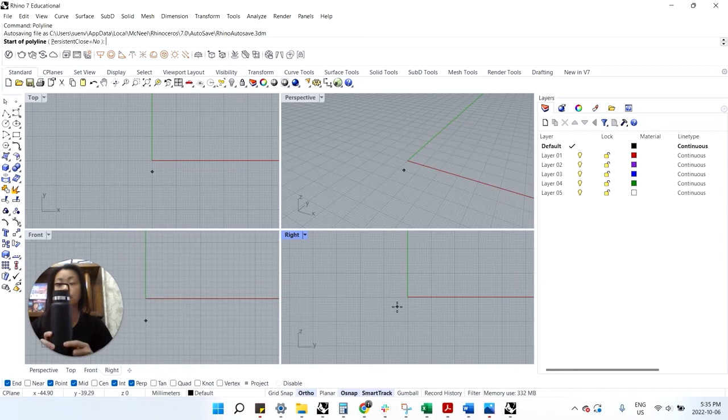So we'll jump right in. Today's tutorial will look at 3D modeling a water bottle, and it looks something like this. Very basic, basically a cylinder, there's a bit of curve at the lid, and then some metal material. We'll look into that, but it's still very simple, and I want to introduce you to some basic commands.

First things first is going into your file, 3D modeling file. You can go to File, New, and essentially just open this up. So going into my front view, I'm going to draw a curve. What you're going to do is draw a profile and then revolve that around and see what that looks like. Let's start at 0, 0, 0.

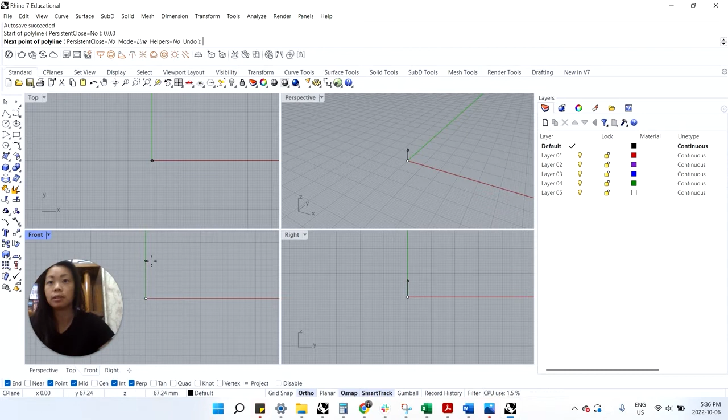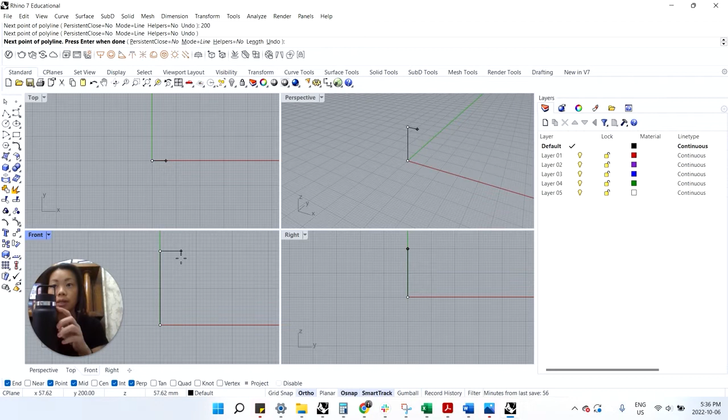So I'm going to type that in. Then I'm going to draw, let's say, 200 millimeters. So I'll zoom out with my wheel, click. And then it kind of curves up if you look at this water bottle, right? So I'm just going to say that's maybe 15 mils, and then it goes up again.

I'm going to model the top. Let's say that goes up 30 mils. I think that's good. And then now the water bottle isn't solid, right?

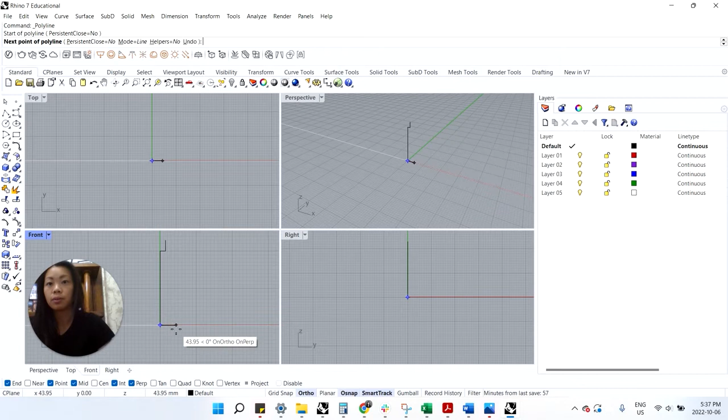So actually it's just like a thin material. So we'll want to think about offsetting that. But first, let's think about what is the diameter of the water bottle. Let's just say it's about 2 inches, so it's like 50 millimeters.

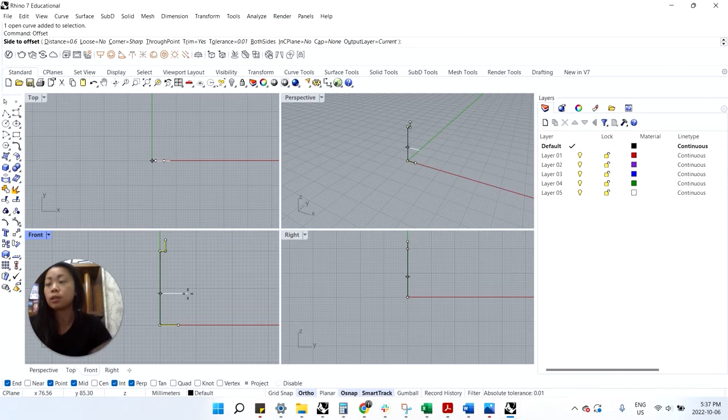So let me select this, hit join. So now it's one curve. Now I want to offset this by whatever thickness I feel that it is. So I'm going to type in offset. And right now we're in millimeters, so I'm going to offset it by, let's just say 5 millimeters.

Offsetting it by the inside, right? And then I'm going to see if I can create a closed loop. So I kind of touch those endpoints, make sure again your Osnap is on so that you can make sure these are snapped. And actually before I do that, these corners are quite sharp, so let's fillet those corners.

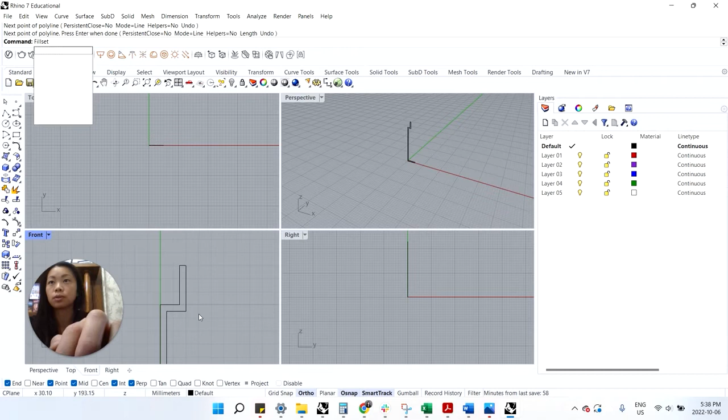So type in fillet, radius of let's just say 10. See what that looks like. I'm okay with that, but I'm going to Control Z and do that again because my trim is not on, so I'll make sure that's on. And then this edge is maybe a bit less, so let's do fillet, radius of let's say 3.

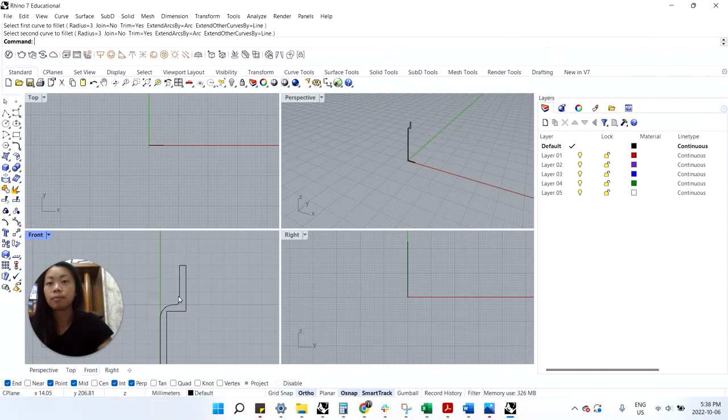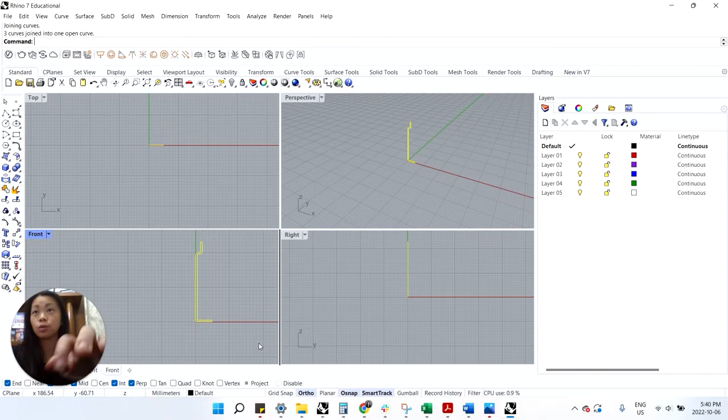I'm okay with that. And then I'll do the bottom as well, so maybe I'll delete this. I'll offset again of 5. Let's see what that looks like. Okay, so I'm going to grab all these lines. I'll type in join, and then it's good. I'll just select that, it has one open end, and I'm just going to hit closed curve. So that would be good.

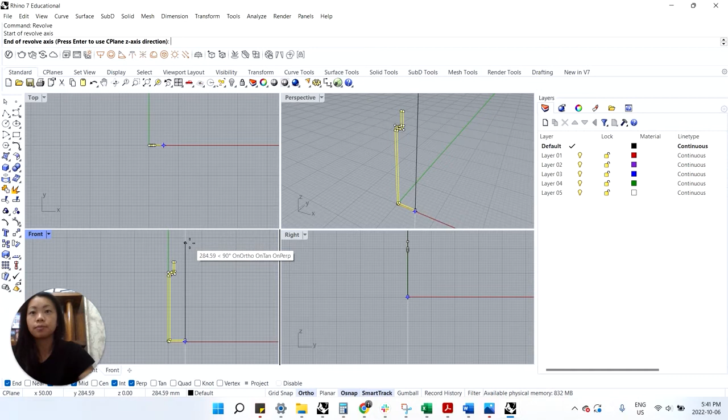Next you'll see, so this is what it looks like in 3D. Next we want to type in the revolve command. So next when we type that in, we need to start the revolve axis. This would be right down the center, for example. Angle, start of the angle is, let's say in the top view or even in the perspective, we can click here, and then we want it 360.

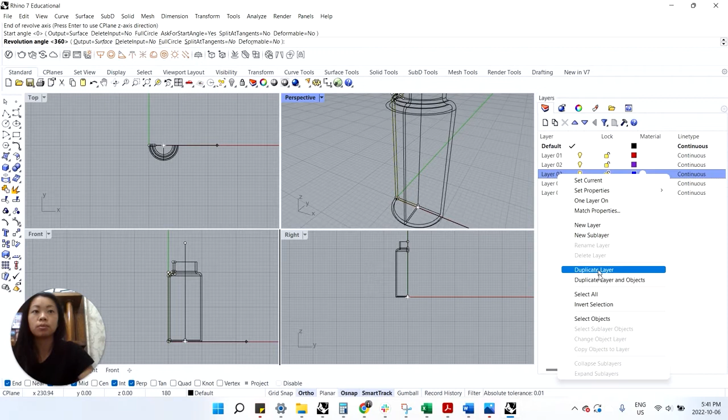Delete input, let's say no. And let's just rename this, or let's make it to this layer. Think we'll hit enter, see what that looks like. Let's create this, change it to the rendered or shaded view. Right, and that's a water bottle. There you go, right? Very basic.

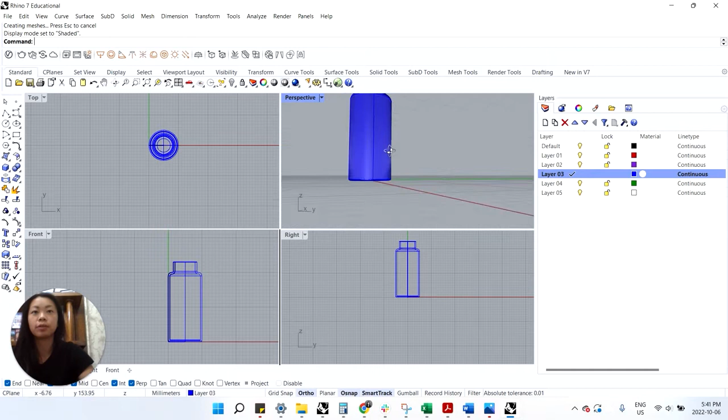We can always rename this to black water bottle body. It's important to have separate layers for separate materials. That's one good way of separating your layers, right? And then this could be your, it's called the red layer curves.

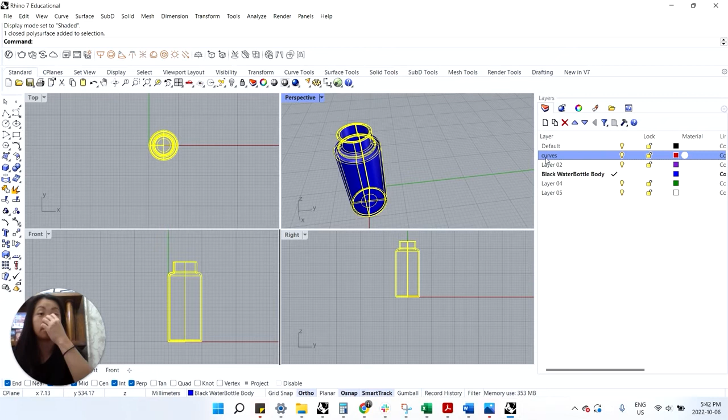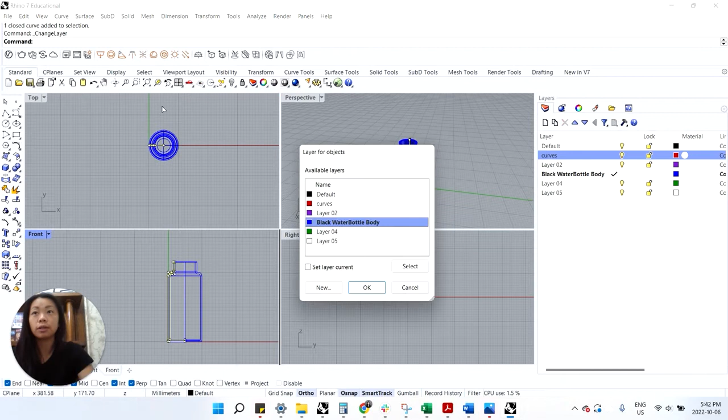So we just renamed the layer here to curves, and we can always choose that polyline, choosing the change layer command and switching it to curves, right? So now we can toggle this on and off as needed.

And next, what we want to do is maybe model the cap right here, right? So it's a cylinder, and we got a bit of a lip as a handle. So we can model that next. I'm thinking I could just do a cylinder, and then I can model the handle separately and then combine them together. So one way of doing that is by simply clicking the curves, I can check off center point here.

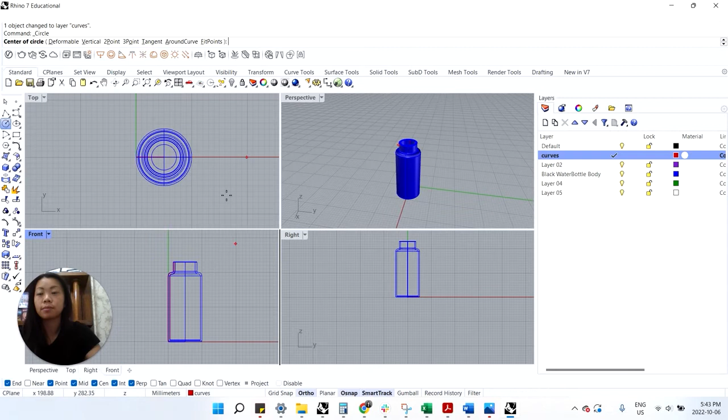Right now I have the projected command on, so it made it go to the 0 axis. I'm just going to shift this up, then I'll offset it by, say, this distance.

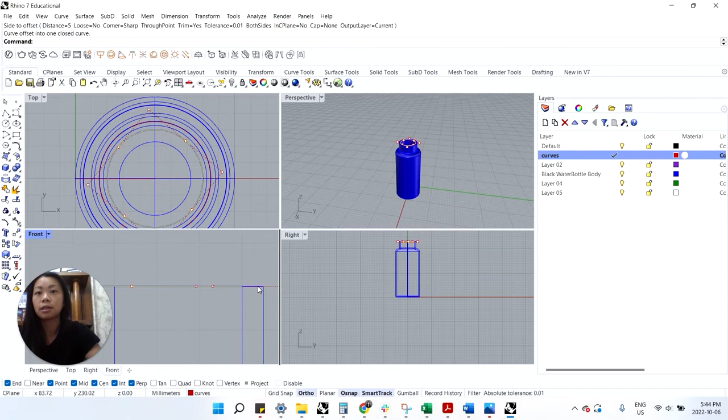So then now, I think if I extrude the curve up, let's say 15. That's what it looks like, right?

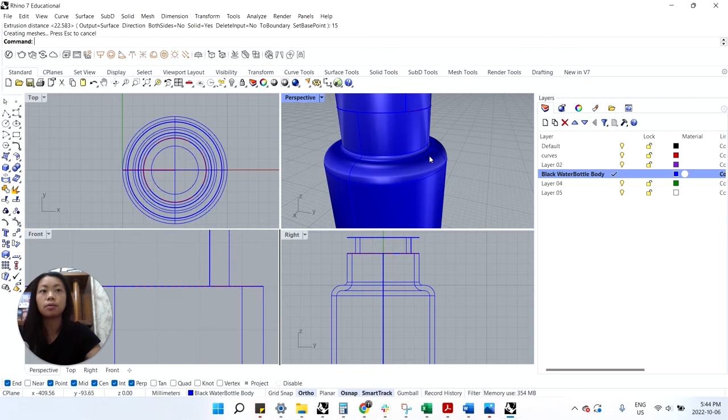So we might want to change that layer. Let's rename this to water bottle, and we'll rename this to water bottle cap.

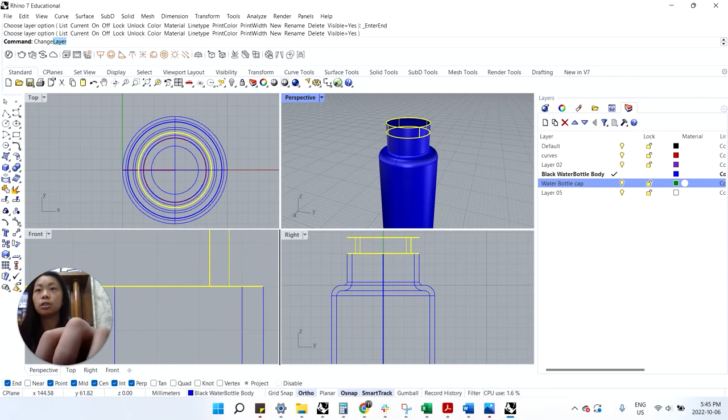And then we can change the layer to - type in change layer - to the water bottle cap, right? So you can see those are distinct elements.

Next we will draw the handle. So let me grab this. This go by, say, 20 millimeters.

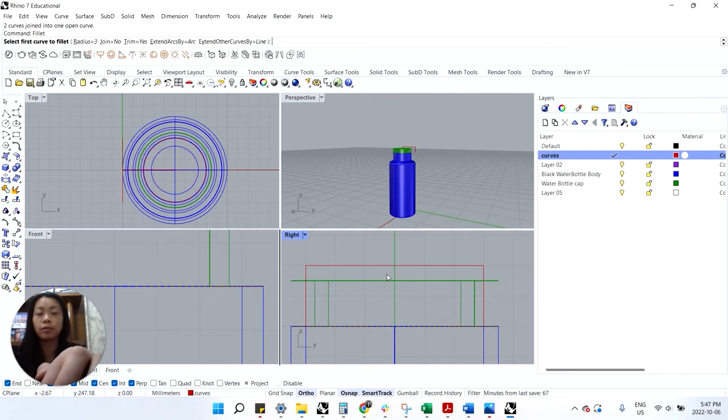Let's see if I can grab - well, I'll just grab this. I can always mirror it. And then I'll join these, and I'll fillet a bit of a curve there by radius of 10.

And then maybe I'll offset this by 3. Seems a bit much, let's say 2. And then let's see if we can join those - join and then close curve.

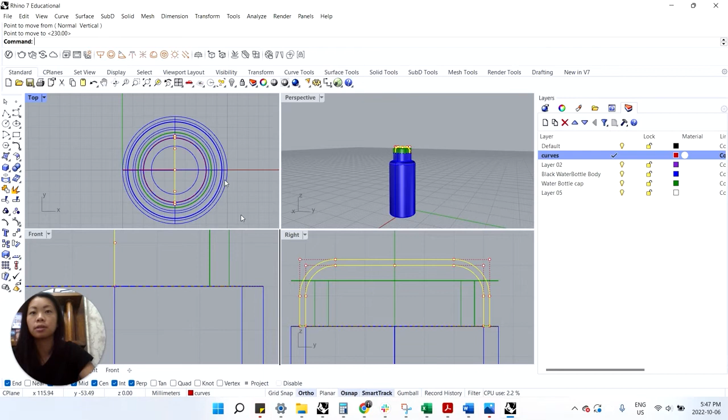There you go, I'll just move this to the center now. And then I can move this up. So now you can see what it looks like there.

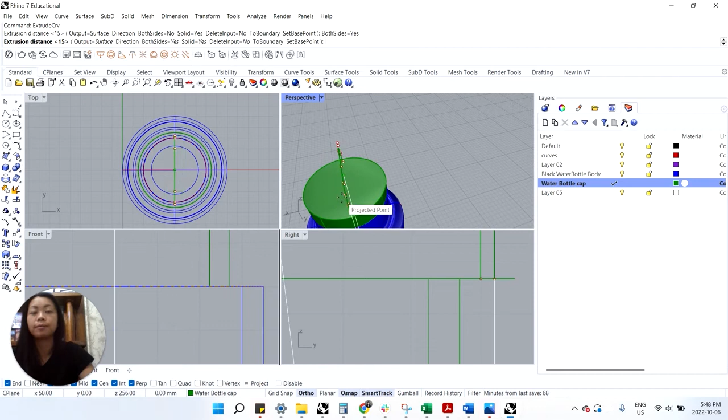And then now I can extrude curve. Make sure it's checked on the water bottle cap. And then we can even do both sides, right? Look at that - since our curve is in the center, we can extrude on both sides.

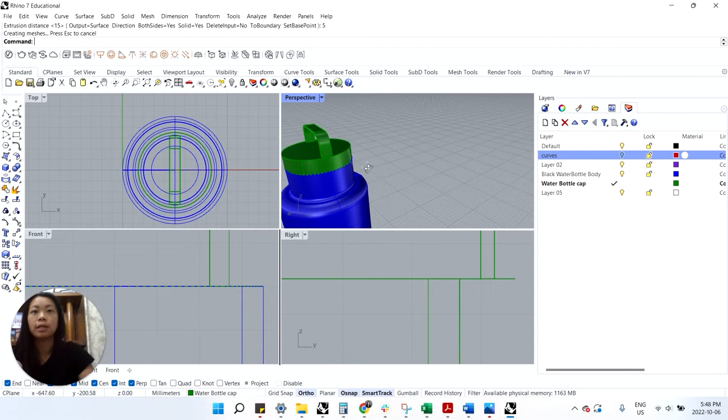Looking at what that measurement is, I think we'll do something like 5 on both sides. So there you go. Switch off the curves. Next we can select both solids and type in BooleanUnion.

So now these are two combined objects. If you really wanted to, you could even draw a lip so that the lid kind of carries forward there. So we could use that solid, for example.

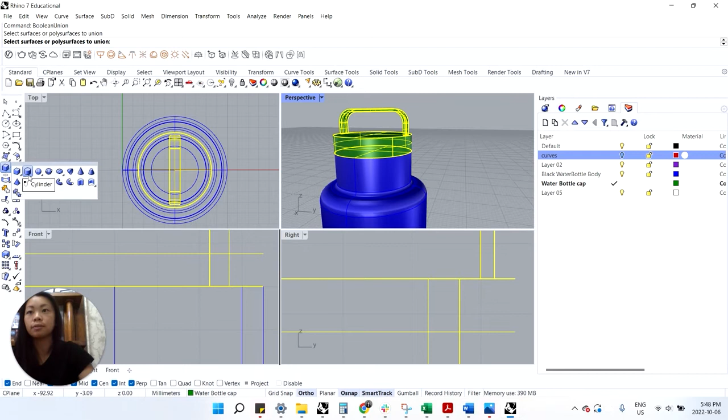Cylinder. If we want to, roughly, I believe it's here, and then we zoom out. What does that look like? Let's do 10.

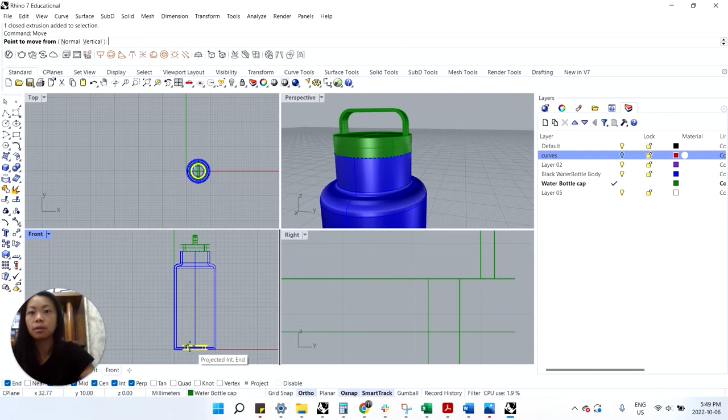We can move that up. Let's see. Right, then we can combine those again, BooleanUnion. So you can see what that looks like - it's like a cap with a bit of a lip there, so it kind of fits in.

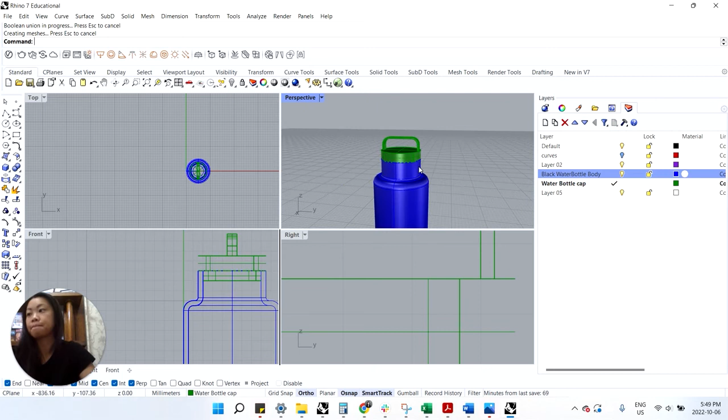And then next we can see like this water bottle that I'm showing you has a metal kind of detail here, and on the bottom is metal as well. We might want to separate those parts of the solids so that we can render them as separate materials perhaps.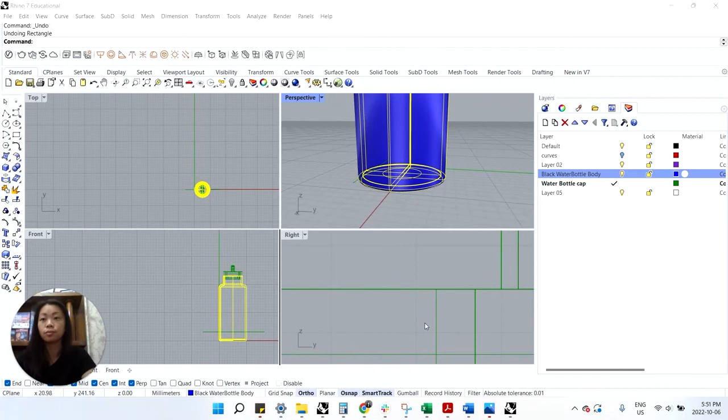So if we're going to split this blue object right here to have that metal lip top and bottom, what we can do is create a plane that essentially splits or slices through that object, and then we can create them into separate elements. So what I'll do is I'll select this command.

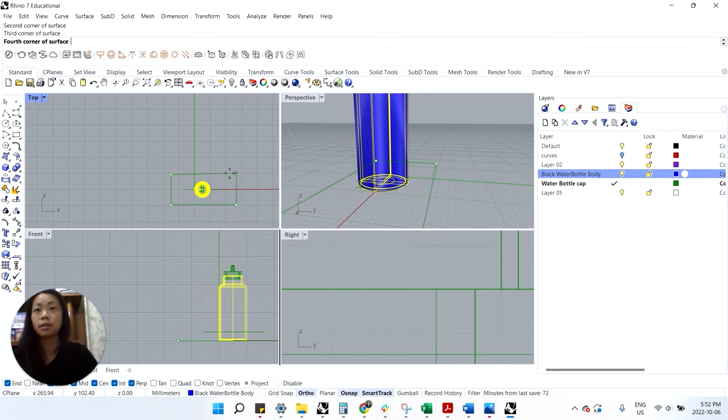It's called surface, and I will create a plane. Again, have project on. Right, so this is a plane, and then I'm going to move it up to some distance - let's just say 20.

And I'm also going to do that at the top, so I'm going to make a copy. And then I'll see if I can grab something there.

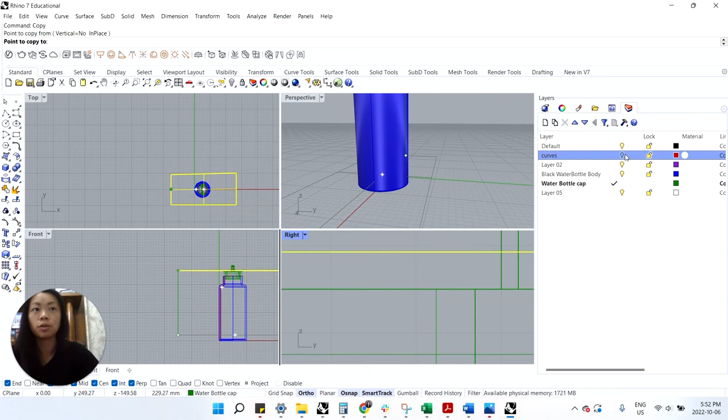Turn on the curve so I can grab that corner. Okay, and then let's move that by 20 as well, let's say. Move it 20 and then click. Alright, so I have two planes.

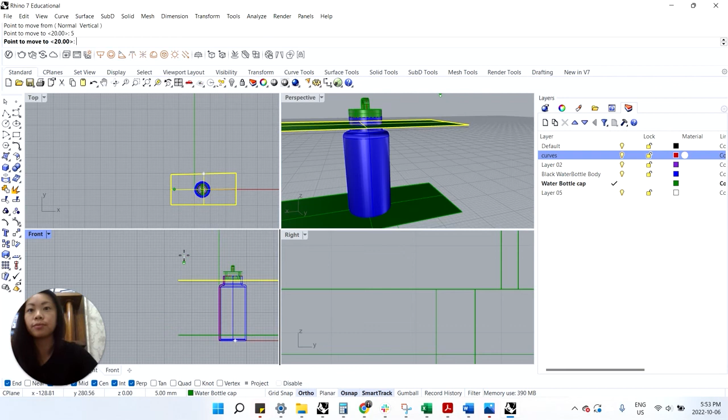I want to slice that top and bottom. Seems a bit thick, let me move that up by 5. I'll click. Then I'll do the same here, move that down by 5. Just aesthetics, so it's not a big deal.

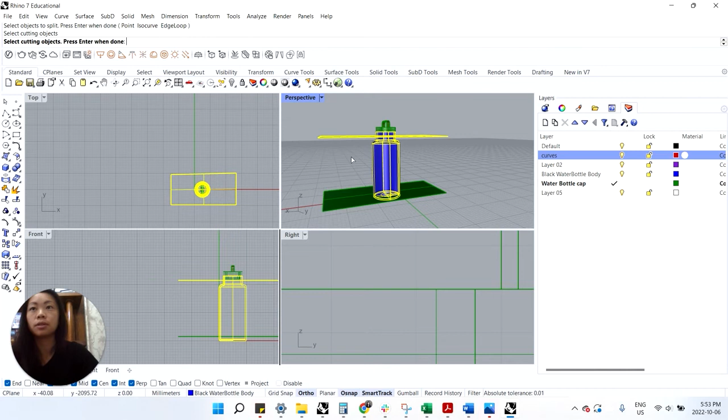Alright, next we'll use a split command. So type in split, select the object you want to split - that's the blue one. Hit enter and then select cutting objects - that'll be this green one, these two green ones.

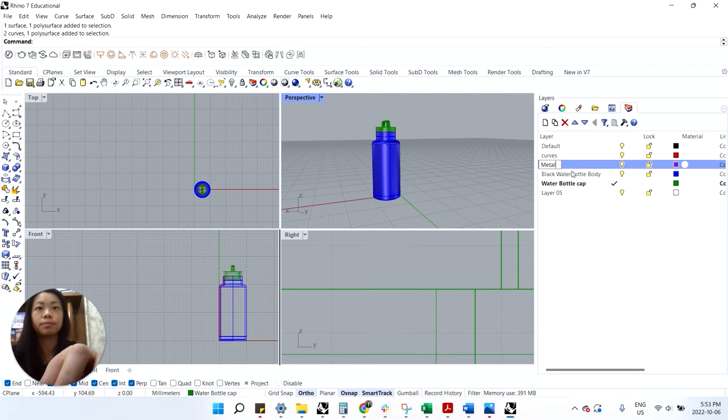And then we don't need these planes anymore, so I'll just delete them. What you'll notice is you'll have a couple objects here and then a couple objects there. So I'm going to rename this purple layer, for example, call it metal.

And I'll turn off the curves, and I'm going to select the objects here, hold shift and select those objects. Then I'm going to change that to the metal layer. Let's turn off the blue for a second so you'll know you have these two planes, right?

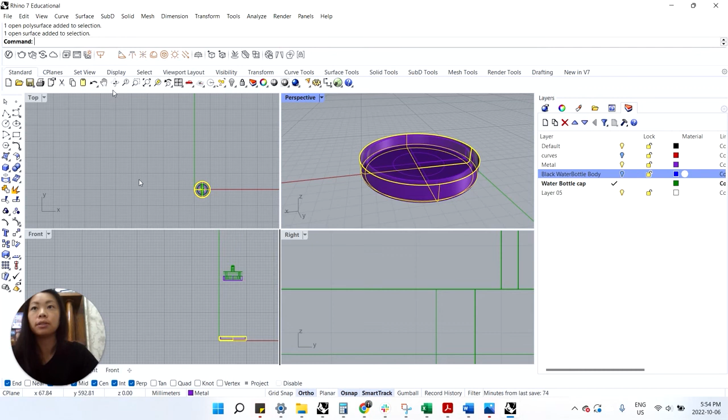And I still need to make it a solid, so what you can do is cap - select objects to cap, there's these two. And then now I think you should have something like that.

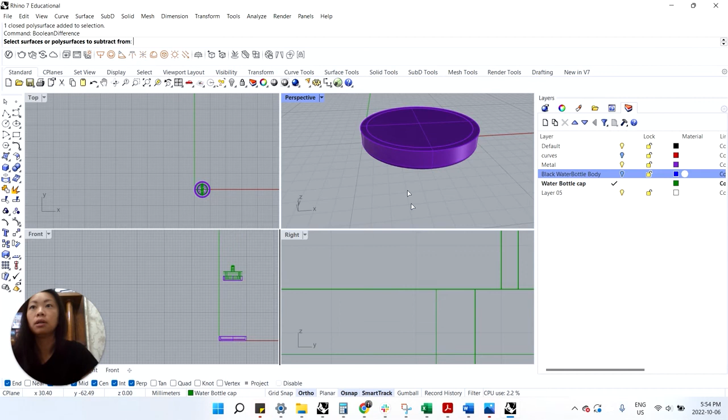It turns out we have two solids, so I can actually BooleanDifference, for example - subtract from is the bigger one, hit enter, and then subtract with is the smaller one. I'll hit delete input, and then we have something like that, right?

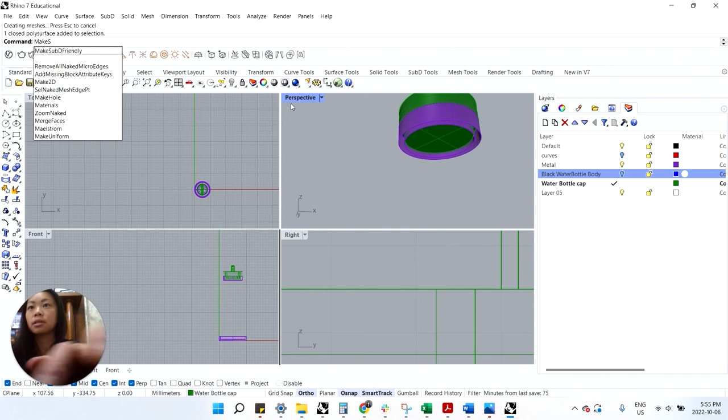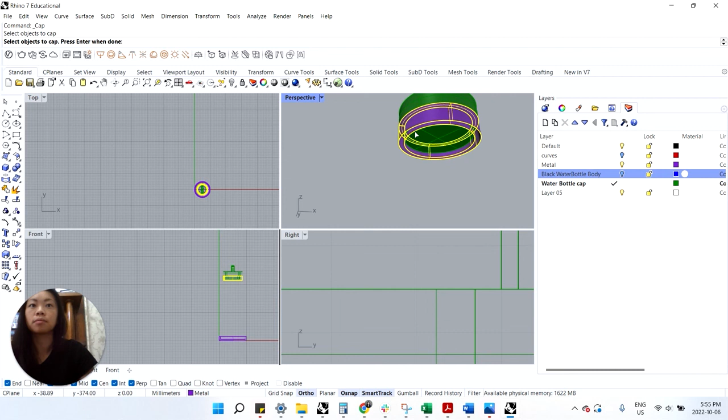So that's good. Another option is we can make surface - I think it's make surface. And so that was just cap surface.

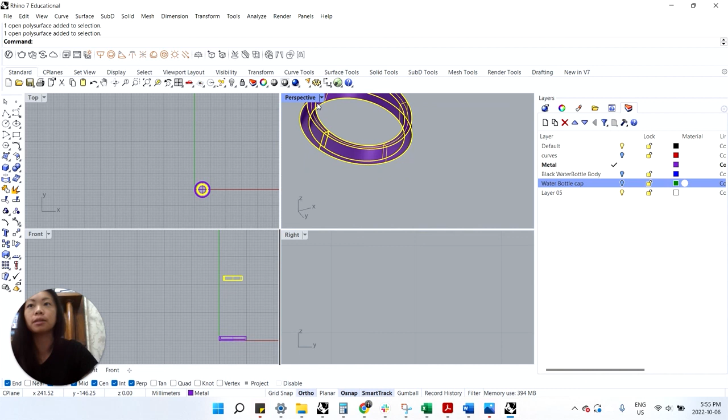Let me take off the water bottle, let's turn that off to see. So this is all connected. We can use that cap command, and there you go - so these are solid.

This is solid as well. And then you can turn back all your objects. And there you go, so there you have it.

Quick tutorial on how to 3D model a water bottle, as well as making sure that each of your different material elements are separate objects, so that when it comes time to potentially rendering, you will be able to isolate each of those objects and allow them to have different material properties.